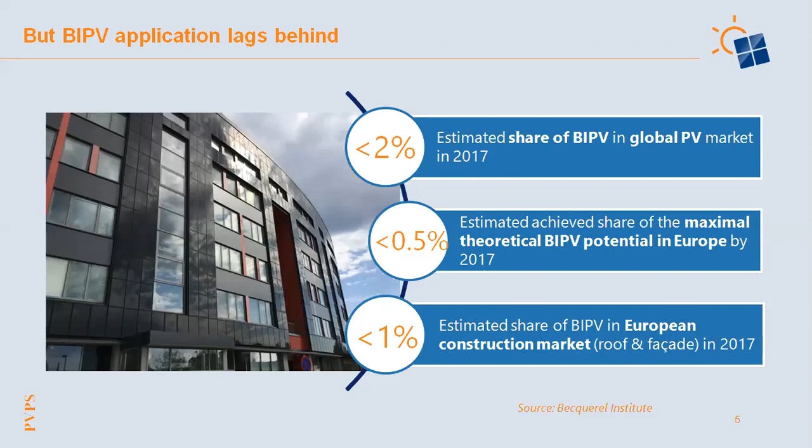What we can see here is that the global PV market is booming already for a number of years. But if we zoom into the application of PV in the built environment, BIPV, Building Integrated Photovoltaics, we see that BIPV only has a very small market share, and a very low estimated achieved share of the maximal theoretical BIPV potential in Europe, less than 0.5%. So we still have a very, very small market segment considering the whole PV market.

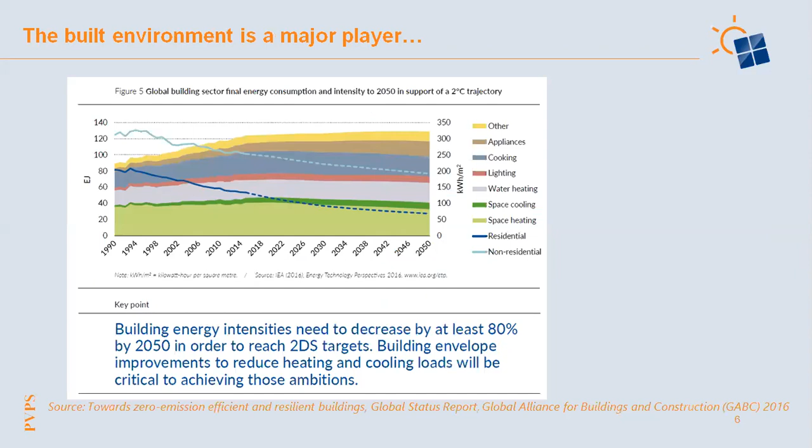While on the other hand, the energy consumption in the built environment is still increasing over time. So we have a huge potential of PV application in the built environment, especially integrated in buildings, but it's not being exploited at this moment.

And that's what we work on in Task 15. We create an enabling framework for BIPV acceleration. It's not about having a grand vision on BIPV or reaching grid parity, but it's really about the basic conditions for upscaling niche markets and products.

In a first phase that is ending now, we have focused on 5 different aspects in 5 different work packages, subtasks, as we call them. We developed a very nice database and a book with good BIPV examples. We developed business models, worked on regulatory issues, worked on environmental issues, and worked on research and development activities.

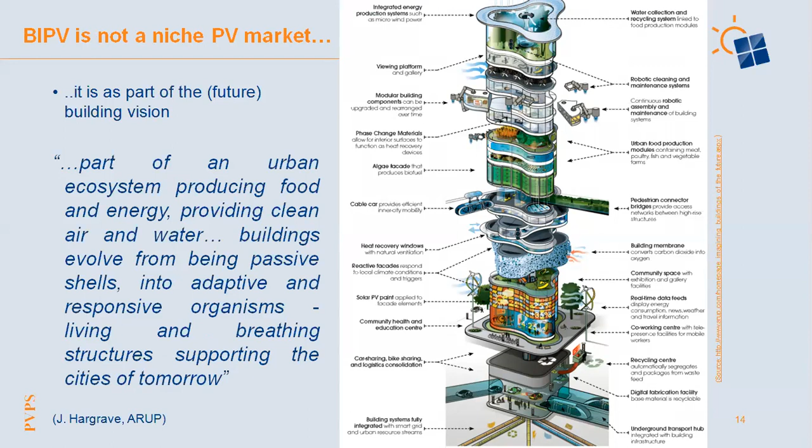I'll start with a first point: we are used to talking about BIPV as a niche market, and this is true today, because it is. But I like to conceive building integrated photovoltaics as part of a growing and dynamic construction sector, a potential and growing sector for construction fields.

I believe BIPV itself could provide an answer to a typical question we still hear today about solar in architecture. Sometimes it seems that aesthetics, architecture, and solar are in opposite positions. But I believe this is not the right question, because the answer today is clear: BIPV has potential.

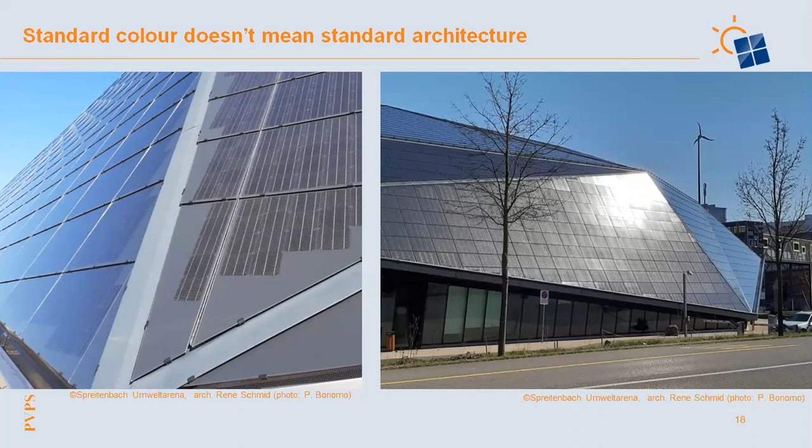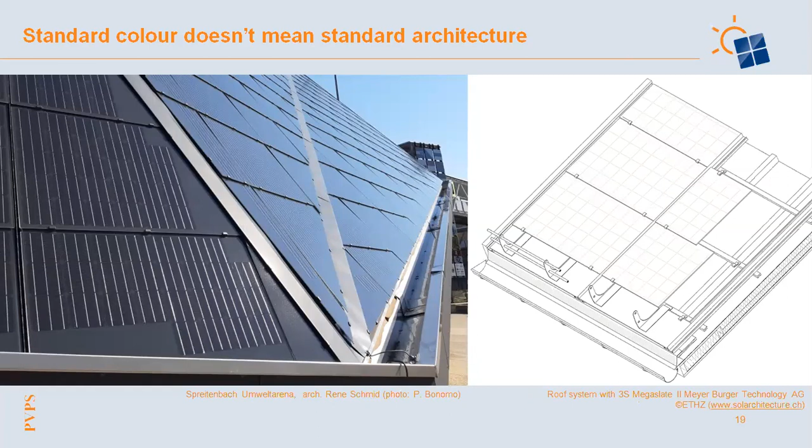Use of standard colors doesn't mean having standard architecture, like in this example, the Umwelt Arena near Zurich in Switzerland. You can see here some special details of this example.

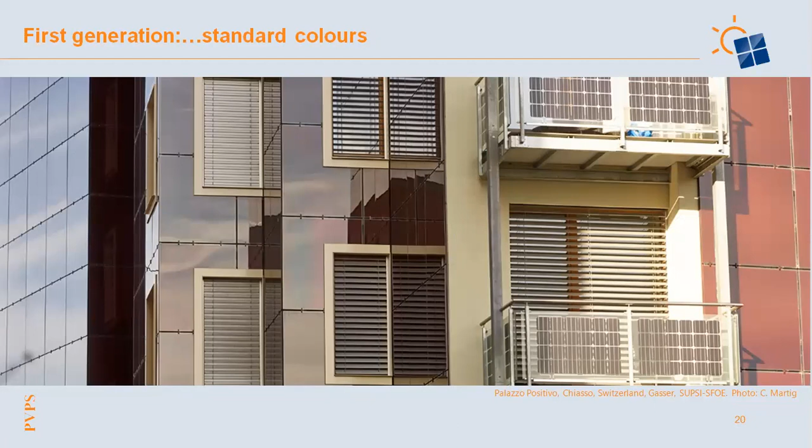It's true that with standard products, we had the first generation of integrated photovoltaics, which was connotated by a standard language linked to the technology. This is a clear example where the technology and language of crystalline silicon and amorphous silicon is really recognizable and visible. So a question is: why do we need customized and colored PV? Is standard PV not enough for this sector?

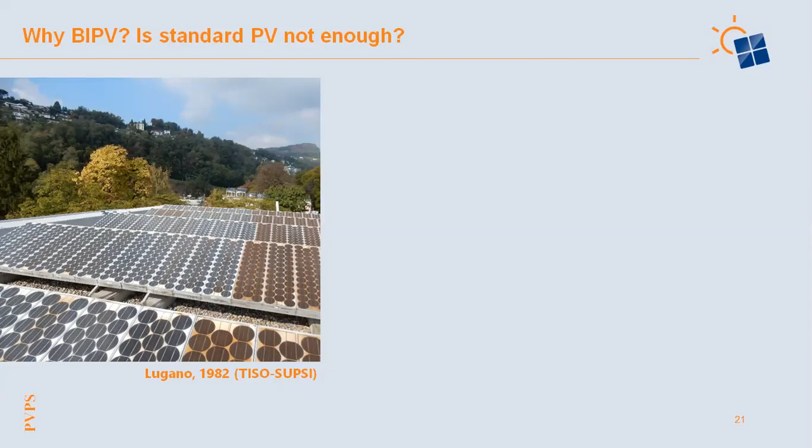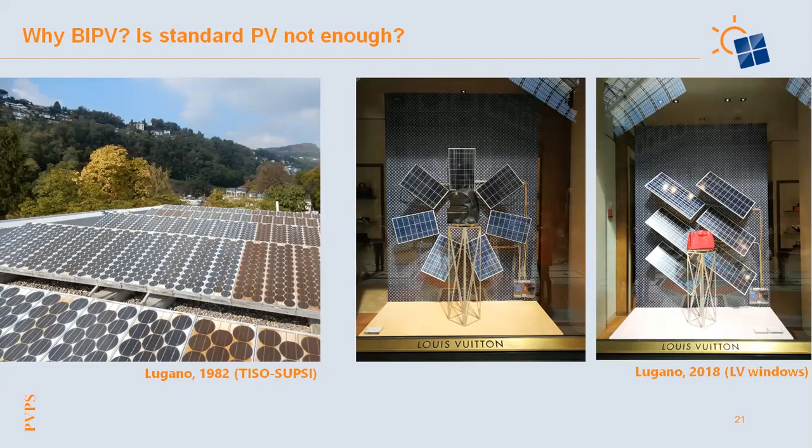So is standard PV not enough? I believe the answer can be summarized with this famous statement by Henry Ford. The problem of standardization for architecture is quite clear, because there is no standard architecture. The need to really fit with different architectural languages and different facade aesthetics is a need of the architecture and construction sector. That's why today we need, and we have, a solar evolution, meaning a real change of concept and technology.

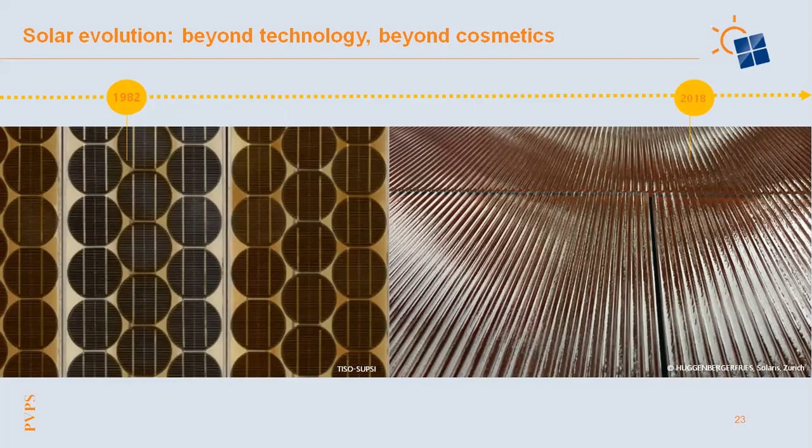Today we can observe evolution in the sector, since the basic solar component evolved from an element basically generating energy to an active element. This is not only linked to component scale, but also at building level, where we are moving from a first stage of solar roofs, mainly used on southern-facing roofs here in Europe, towards a new generation of fully active buildings.

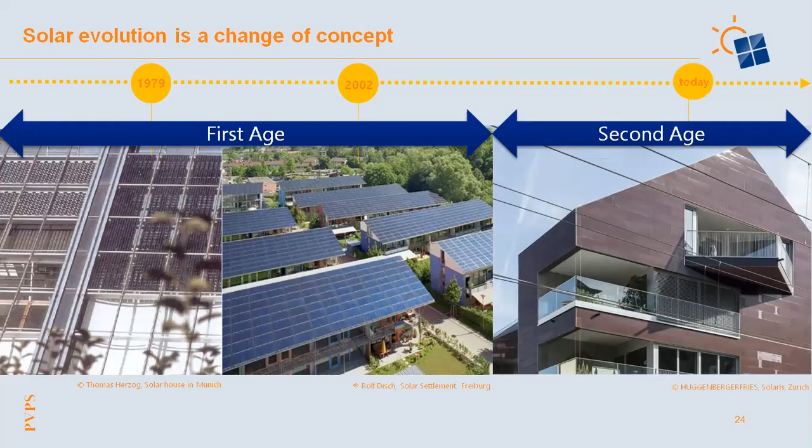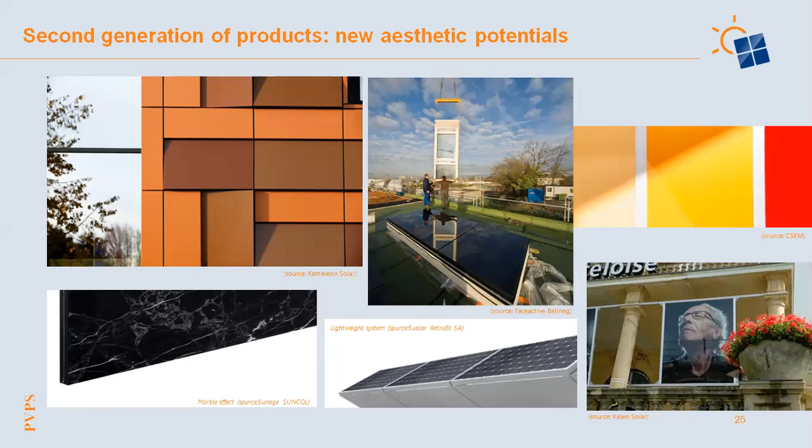You can see what is possible today thanks to industry and industrial evolution. This was possible thanks to clear improvement and evolution in the solar industry in recent years. I mention in these few slides just some of the products available today, so I think it's quite evident, without going into details, what is possible today in terms of aesthetics and construction technology. I mentioned some producers here, and I apologize to the rest for not mentioning them, but today we really have a lot of possibilities and chances for solar architecture.

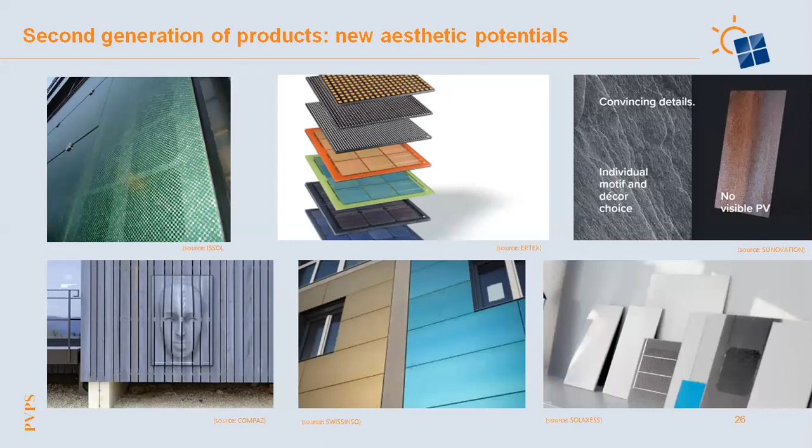We can say that in some applications, mainly based on glass technology, today the main limit is really the glass, and no longer PV technology for BIPV. So whatever is possible with glass has been demonstrated to represent a possibility for solar architecture. I will show quite briefly some examples.

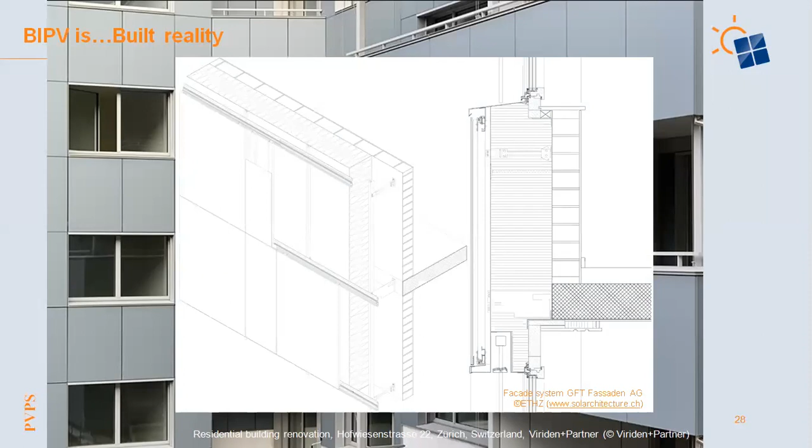Here we are in Zurich. It's a building renovated by Viriden and partner, and every surface that you observe here is an active photovoltaic surface. It's a conventional construction system for a building skin where the external cladding is replaced with a solar component.

So we have real buildings, reality of solar buildings, where all the claddings, all facades can become active. And we have also the possibility to say that nobody today can recognize that these are solar-powered houses. So this is what is possible today.

This demonstrates that we can go also beyond pilot buildings. We can adopt and implement these technologies also in ordinary building contexts.

And for who of you is curious of much more detail, I can suggest you visit our website, which is supported from the Swiss Federal Office of Energy, and we are implementing with ETH and also Swiss Solar partners. You can find here much more details about these buildings.

So this change of concept and of photovoltaic technology, of course, it's not free of challenges, because we open a lot of challenges, since we have multifunctional components, which of course have to produce energy, but they have to comply with a wider set of building and construction requirements. So a lot of points of innovation are under research and under examination from industries and from research institutions.

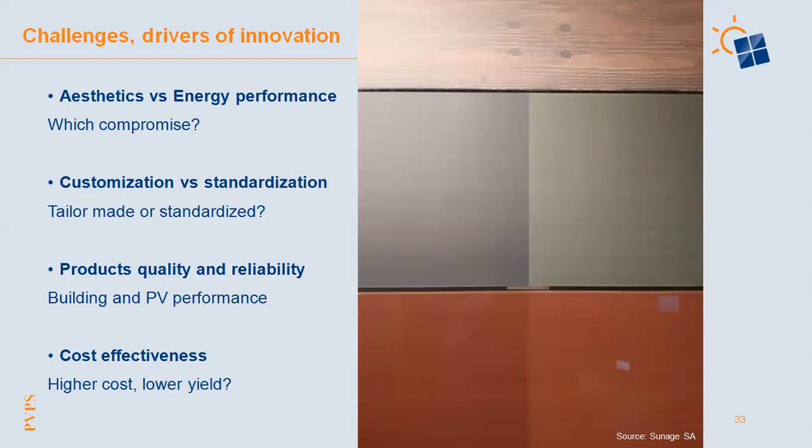I listed here some key topics on which today we are working and we are doing research. So of course, we will also see in next presentations which is the relation between aesthetics and energy performance, and also other points: standardization and customization, how they can dialogue, and also which is the quality and the reliability of such products. And last but not least, which is the cost.

I briefly mentioned this research that will be presented in detail by my colleague Erika Saretta later on. Just to show you that we are active on analyzing and understanding the performance of these devices. Investigation is important to understand which is the effect of these aesthetic treatments on the electrical behavior, on the power production, and on the reliability of such modules.

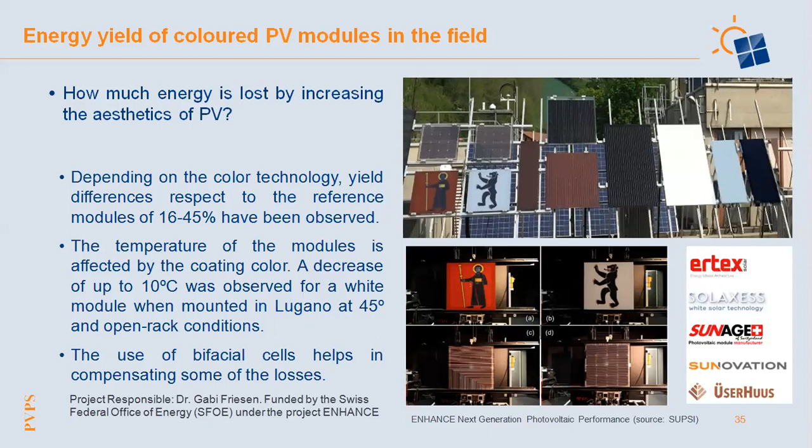And another project again here at SUPSI, I thank my colleague Gabi Friesen for this slide. You can see here another measurement campaign that we did here at SUPSI, where we characterized some main colored and special modules. We compared the performance, and we observed some interesting results in terms of energy yield and also of thermal aspects. I put here the reference to the project, so it's not the scope of today to enter in detail of this aspect, but mostly to provide you some main reference.

Another aspect is the digitalization of the process. It's a key point of today's innovation to work on a digitized and integrated process. This is most important in case of innovative technologies. So an integrated value chain and development of software for designing and supporting the real stakeholders in implementing this technology is crucial and is important. We are active also on this aspect in some ongoing European projects with our partners.

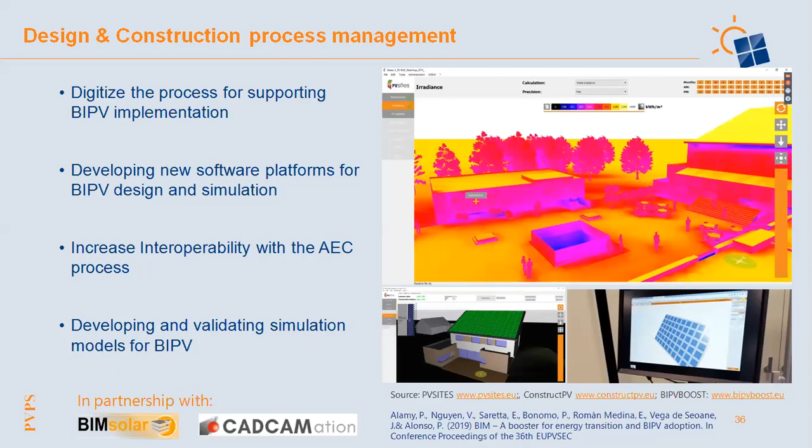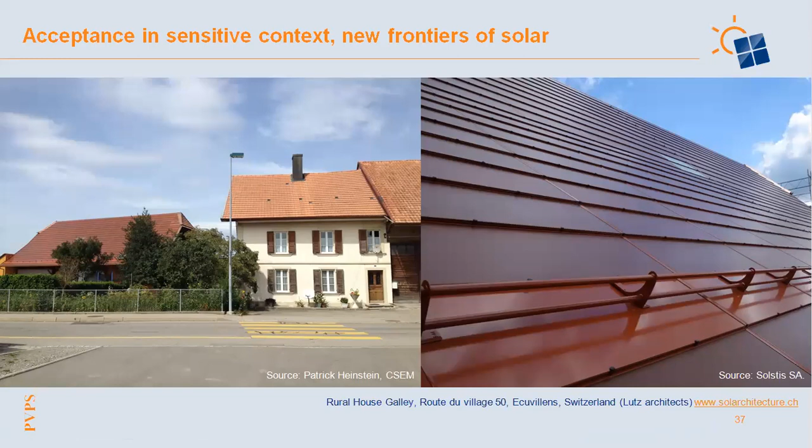Again, this technology finally also makes it possible to integrate solar in sensitive contexts and in protected areas. So this is also another added value of these technologies.

And about cost, this is another key question, because how much does the BIPV cost is a key question for the feasibility of this kind of solar technologies. This is a quite complex question, because it's important to put in clear what the cost is referred to and which cost are we talking about. Otherwise, we risk to just mention some values of cost on square meters and so on, which are not very well contextualized.

Just a quick comment on cost: it's important to highlight that the cost for making active a facade or a roof is an extra cost in comparison to a non-active element. So the basic concept is to conceive photovoltaic as an extra cost, which is a part of added cost for a conventional element, but it's also an active part.

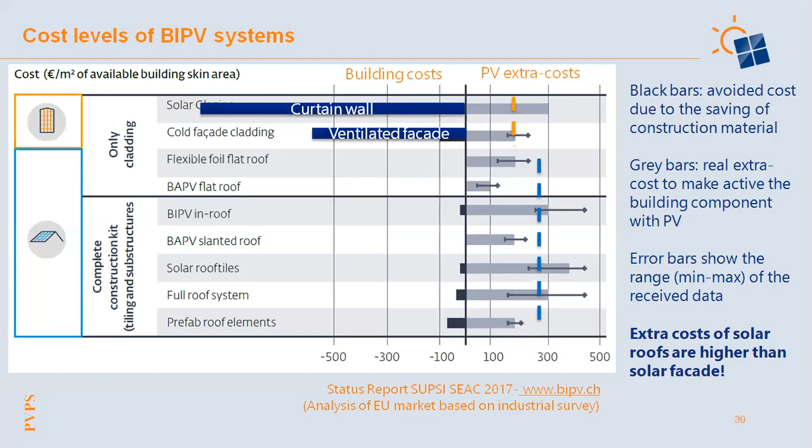So everything can be calculated also on the basis of the return of investment in this perspective. And these are some concrete results that we observed in some Swiss examples. We are investigating in detail the cost breakdown and the main voices of costs for real BIPV facades and real buildings.

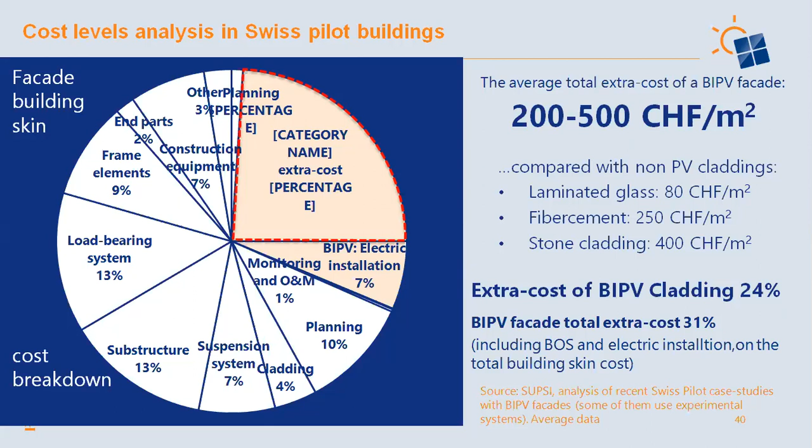These are some numbers. We observed an average extra cost of 30% on facades, and we are working on that, as I mentioned, to really investigate the impact of these technologies and also the potential return of investment.

I hope you will have the chance to go more in detail in the articles and references in my slides. So I can conclude by saying that our challenge today is not just to have pilot buildings, but to really implement BIPV as a mainstream construction product. It's important to link innovation with cost reduction and a real strategy of implementation to ensure a growing market of these products.

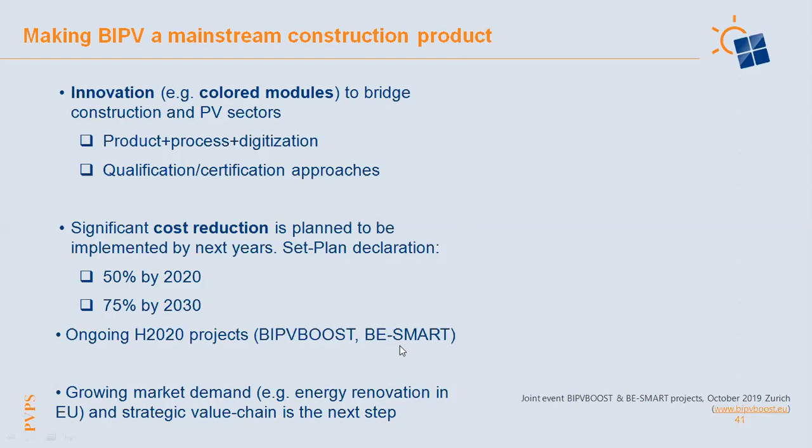I will be happy to reply to any question in the dedicated session ahead. And I conclude by saying that color is a way of integration, but as I mentioned before, we have also other challenges to solve. I hope every one of you will be part of this challenge, so I wish you a nice solar design. That's all from my side.

Hello, here is Gabriele Eder from OFI in Austria, Vienna. I will take you through the second part, the technological part concerning colors of covers, coatings, printings, and films.

At the beginning, I want to show you the principal construction of a typical BIPV module based on crystalline silicon technology. I will go to the other technologies a bit later.

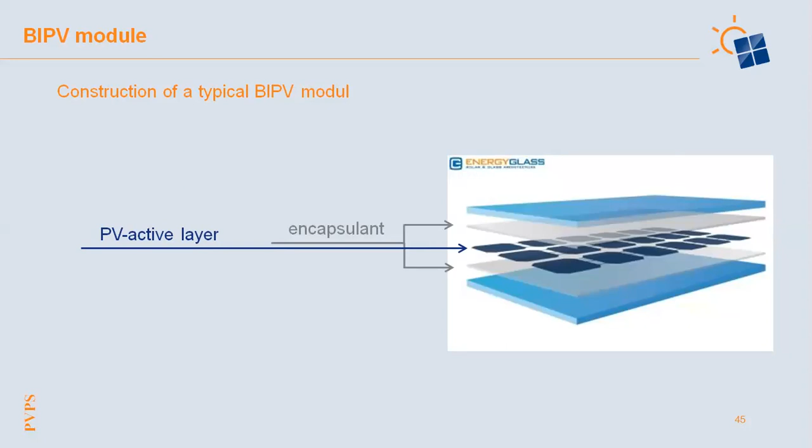So we have the PV active layer in the middle, embedded by a polymeric encapsulant. On the front side, we have mostly a glass cover, or it might also be polymeric for flexible systems, and the back cover is either glass or another panel of a construction material.

Nearly all of these layers can be colored, and I want to show you now all the possibilities realized up to now.

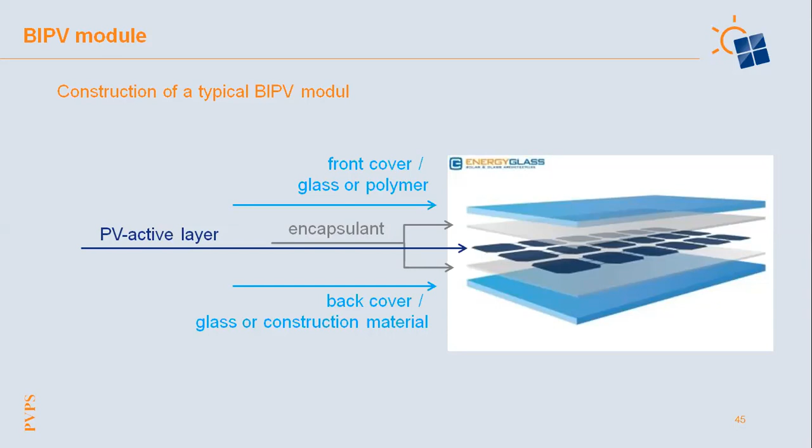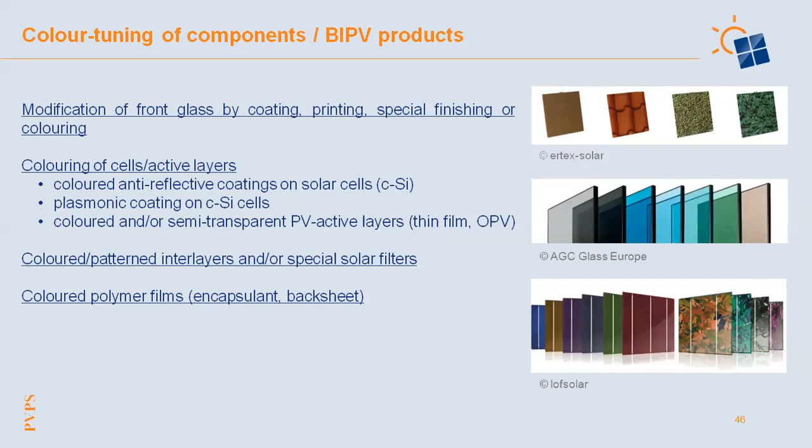But there is also the possibility to use colored or patterned interlayers, which give the color, or use special solar filters. And finally, I want to show you an example of colored polymeric films, the encapsulant or the backsheet, which can also color the whole BIPV element.

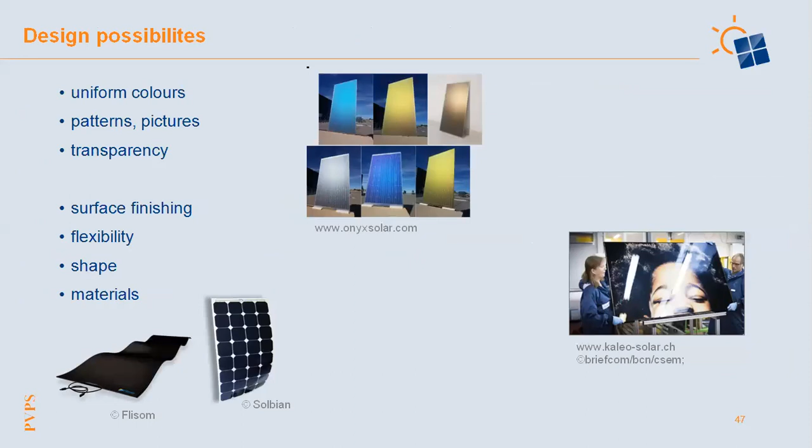So which design possibilities do we have? We can have either uniform colors, patterns or pictures, different transparency options. The surface finishing might be important, especially with respect to glare, whether we have a matte surface or a shiny surface.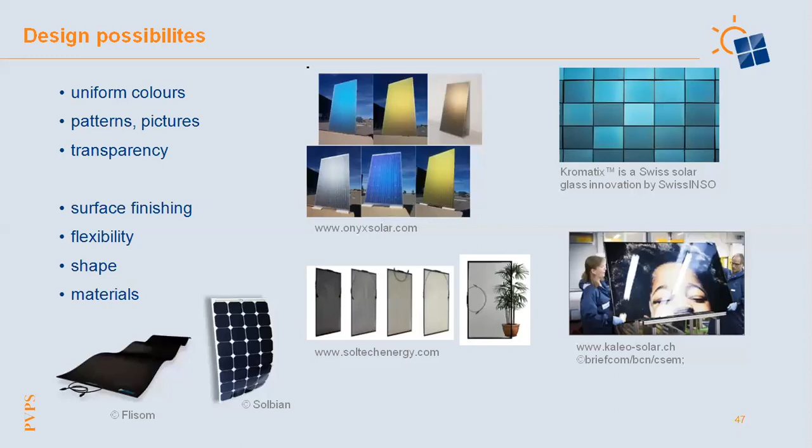As shown in these two examples at the bottom, there is the possibility to have not only rigid but also flexible BIPV modules. Here we are also a bit more open for different shapes, especially with organic PV and different materials. So for the color tuning, we have three main different implementation possibilities.

We can either do a color coding of the various components, or have a print either on a polymeric film or on the glass, or we colorize the whole material. But we always have to keep in mind that color has an impact on the efficiency of the PV module. This will be explained in detail in the last part of the webinar.

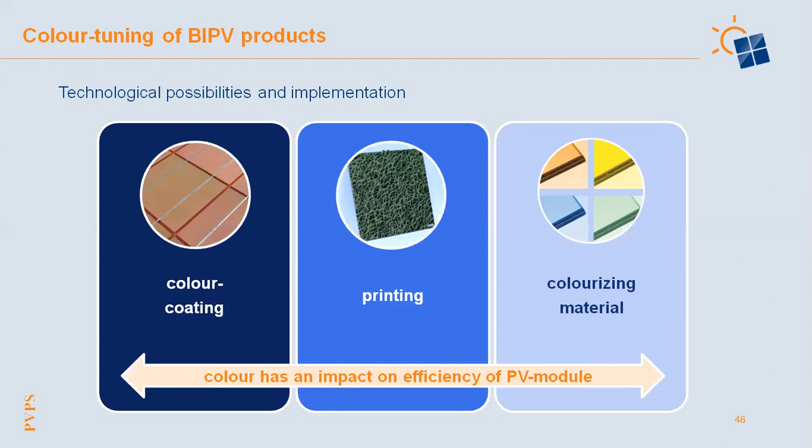So I want to start with the front glass, which surface techniques exist to color it. One possibility is to use spectrally selective coatings. The first one I want to show is the Kromatix technology, developed by SwissINSO.

They use a multi-layer reflective coating on glass. It's a specific sputtering technology, and you can have different colors such as gray, terracotta, blue, or green. As you can see in the small table I showed you, the solar transmittance is still between 86 and 90%, so that's quite a lot. You don't lose too much by using these color coatings.

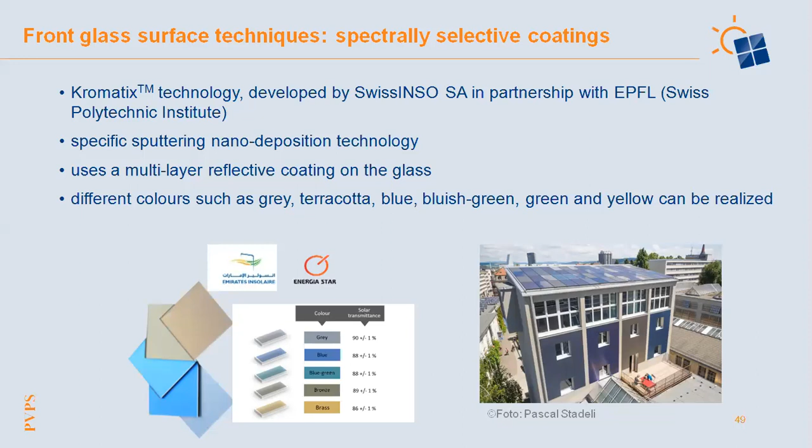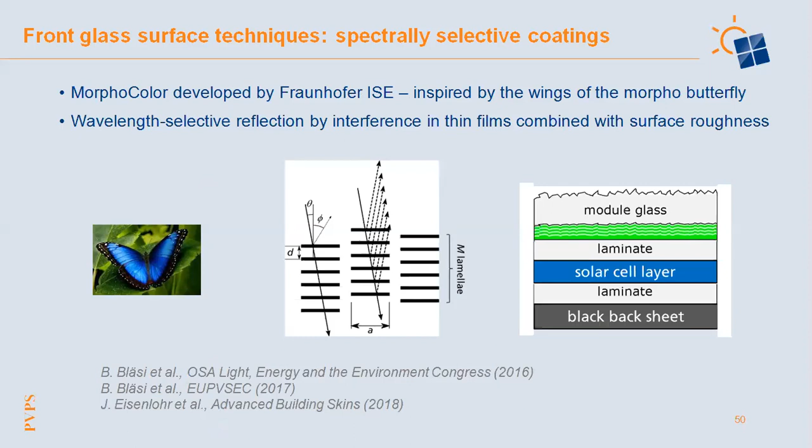Then a second technology developed by Fraunhofer ISE, MorphoColor, is also a type of spectrally selective coating. It was inspired by the Morpho butterfly, using wavelength-selective reflection by interference in thin films combined with a special surface roughness. As you can see here, you get very saturated colors with different individual color choices.

And here you also have 90 to 93% of the original efficiency of the module compared to a black one. What's also worth mentioning is that it has very good angular color stability and reduced glare effect due to the rough surface.

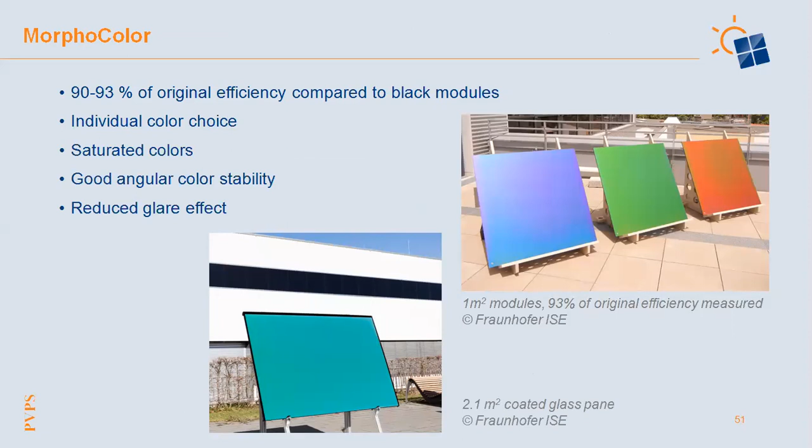The other technique to modify the glass surface is printing, either by digital printing, where before module production, ceramic colors are printed on the front glass using a 4-color inkjet printer. By using that, you can really generate each color you want to have, not only uniform colors, but also different patterns or photos printed on the glass. You can print either on the environmental side, plane 1, the outside, or on plane 2, the side next to the encapsulant.

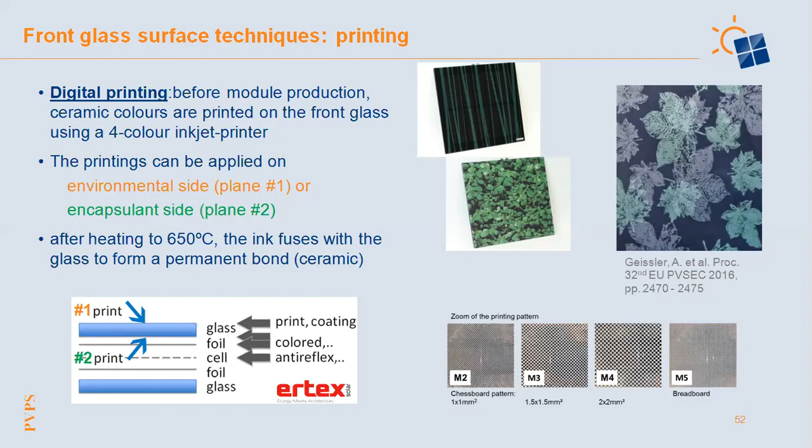It's possible to print different patterns so that at least 50% of the glass is not printed, so that enough light can pass through the glass to reach the cell and produce electricity.

Another type of printing is screen printing. Here the ink is applied through a fine mesh screen onto the glass, and you can use different fabrics as a mesh screen to generate different decorative effects. The example of this house in Switzerland was already given by Pierluigi before, where you get a very homogeneous color effect. In this case, you have a combination of printing on the inner side and a special satin finish on the outer side, giving you this colored matte surface, which is very nice.

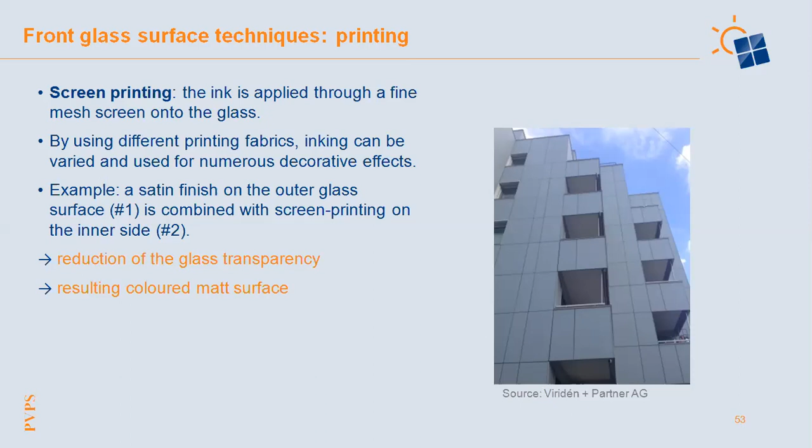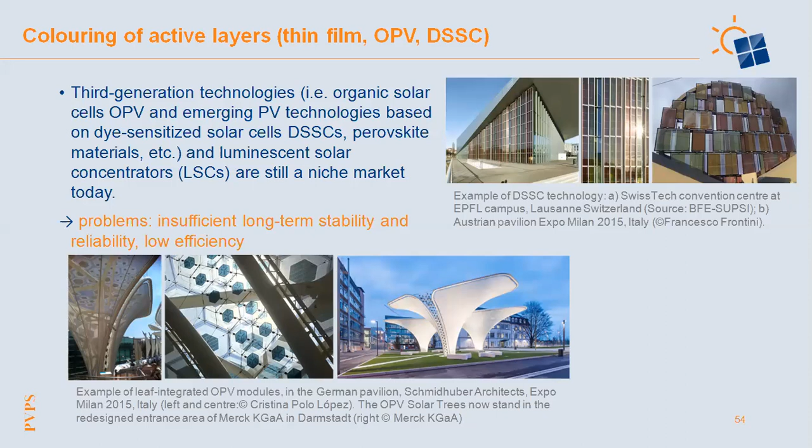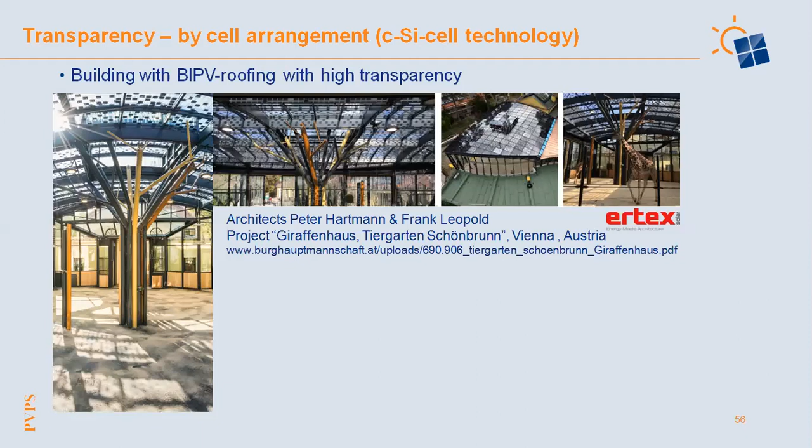Transparency with the standard crystalline silicon technology can only be achieved by a special cell arrangement. If you increase the distance between the silicon cells, since silicon is not transmissive at all, you get a shading effect plus good lighting in the room beneath. Or you use laser cutting to create special holes in your silicon cells, allowing you to control the light entering into your house using this technology.

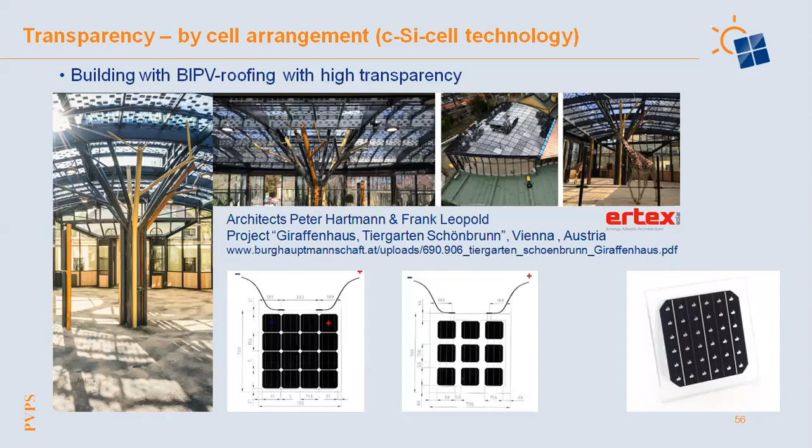Another way to color crystalline silicon cells is an anti-reflective coating on the cell with a special thickness. Nearly all crystalline silicon cells have an anti-reflective coating to decrease the high reflectance values. Usually the optimized coating has a blue color, which you all know from mono and polycrystalline cells. But if you change the thickness of the film, you can achieve a special color effect.

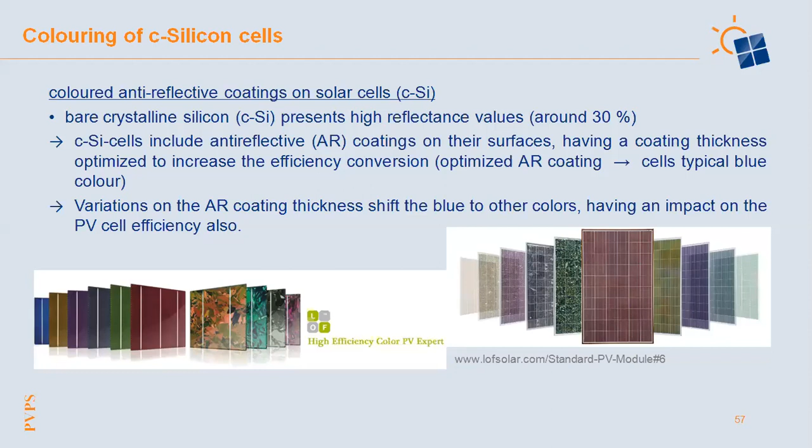Then the next possibility is to use colored or patterned interlayers or special solar filters. With this technology, CSEM, the Center of Swiss Electronic and Microtechnique, had two projects showing really white BIPV products. They used a very special scattering and reflection filter on the surface of the front glass cover, but at the expense of an efficiency reduction of nearly 40%.

Kaleo Solar realized a technological solution integrating high definition images into the solar panels. In the picture here on the right hand side, you see that you get really a very nice effect of the picture. So the last example I want to...

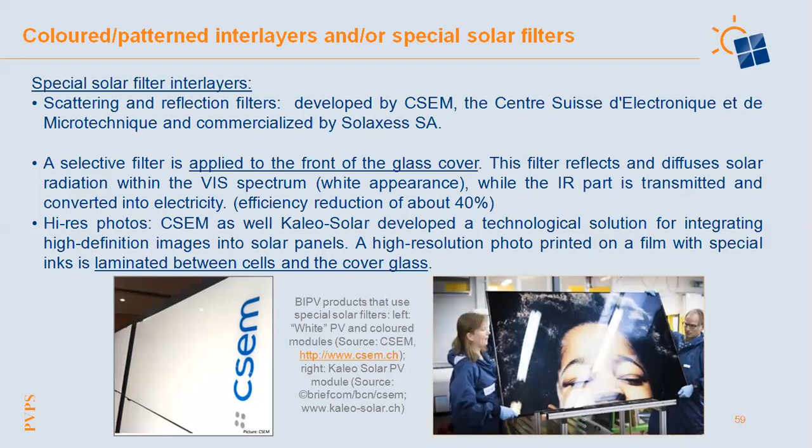You can probably take your time to finalize your pending slides.

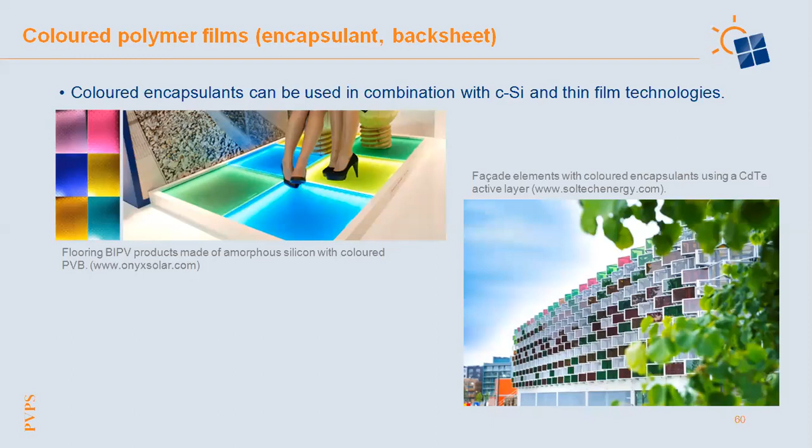I have only 2 slides left, with colored polymeric films, where in this case the encapsulant beneath the solar thin film is colored, so it does not come at the expense of efficiency.

Finally, this is the bridge to the next talk: you should keep in mind that mainly when you put a lot of effort into color and transparency, there's always this field of tension where you lose electrical performance. Thank you very much.

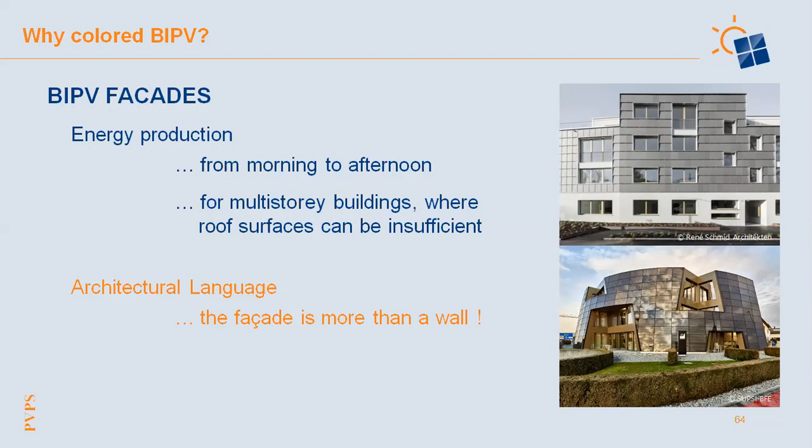This is the reason why today in the market there are colored BIPV modules that are emerging and spreading all around the world. As we have already heard from the previous presentation, there are different customization options for realizing colored BIPV modules, such as the type of glass, the type of colors, and the different techniques for printing colors on glass. There is also the possibility to choose the position of the color.

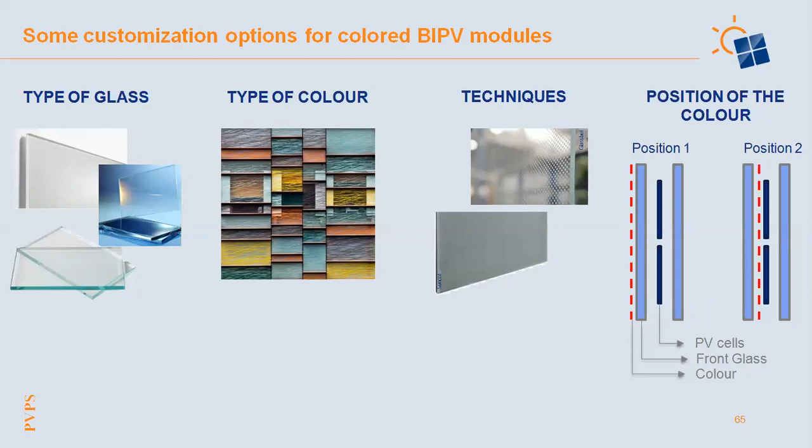We can apply color on position 1, meaning on the outer side of the front glass, or in position 2, on the inner side of the front glass. This involves that the efficiency of the PV cell of the module can decrease due to the additional colored layer put in the module, which led us to the question: how do glass customization options affect the electrothermal behavior of BIPV?

This is why today I'm going to present the results of the first experimental campaign on colored BIPV modules realized with mineral coating, and the second campaign on colored BIPV modules realized with digital glass printing.

For the first experimental campaign, I will present the results of the electrothermal characterization on monochromatic BIPV modules. In particular, we characterized the modules both indoor and outdoor: power measurements on single prototypes, and power and temperature measurements on single prototypes in outdoor conditions.

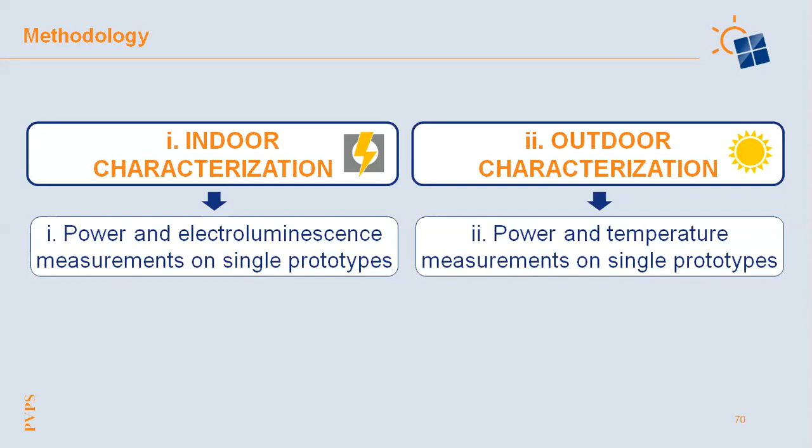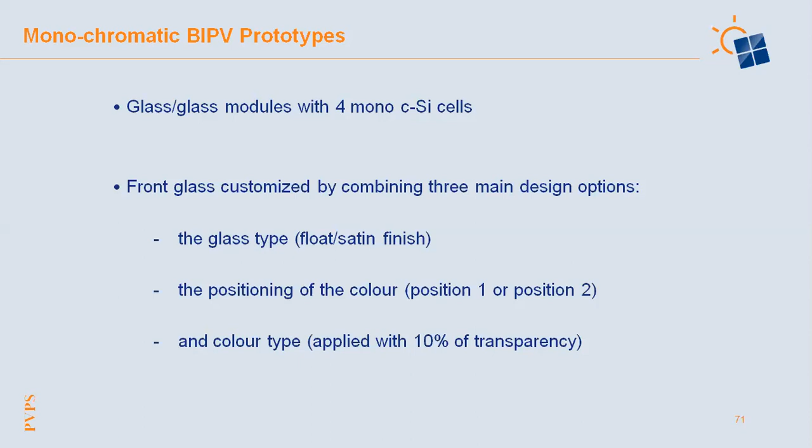Thanks to the collaboration with Swiss BIPV module manufacturers, we obtained small prototype glass modules realized with monocrystalline cells connected in series. We asked for different design options for the front glass, resulting in different prototypes with float glass or satin finish glass, with color applied in position 1 and position 2, and different color types applied with 10% transparency. Here you can see some pictures of some of the prototypes that we worked with.

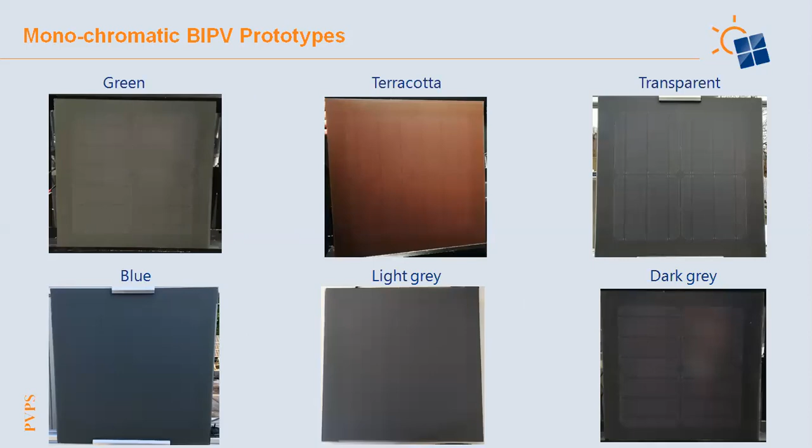Here you can see the results of the power measurements that we performed at standard test conditions. For each color, we have prototypes with satin finish glass with color applied in position 2, and prototypes with float glass with color applied on both position 2 and position 1.

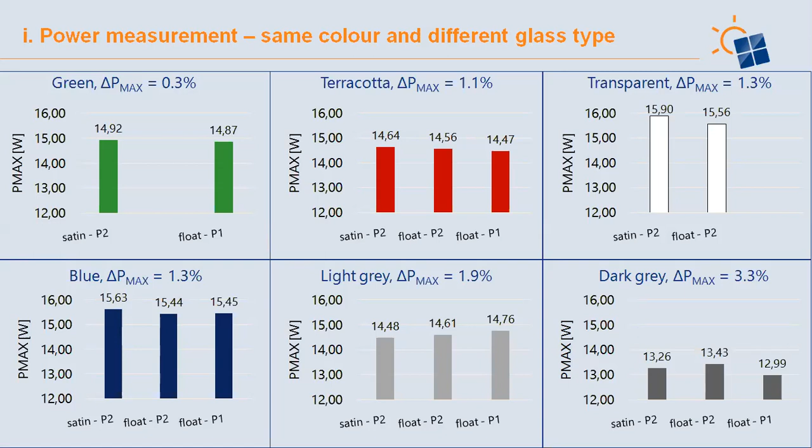What is important to note from these graphs is that the glass type doesn't significantly affect the power output. The maximum difference is 3.3% for the dark gray, and the minimum is 0.3% for the green modules. Moreover, there is no evidence of a difference in efficiency when the color is applied on position 1 or position 2. What mainly affects the power output instead is the color type.

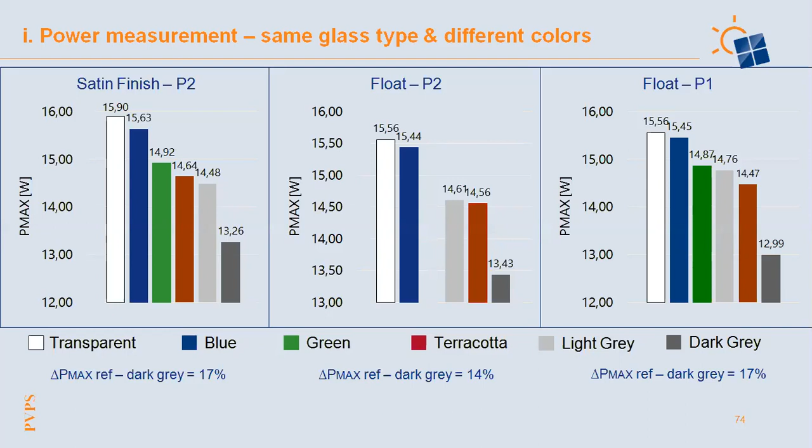As we can see here, the same results are displayed depending on the glass type. The maximum differences in terms of power output amount to 17% when we compare the dark gray with the reference model. Also, it is nice to see that the blue modules are the ones with good performance.

However, another important aspect to investigate was the possible temperature effect due to the application of color on the modules. Indeed, when the temperature of the module increases, the power output decreases. So to investigate this, we set up an outdoor stand where we installed some of these prototypes as facade elements, in the vertical position, and equipped them with a special MPPT for monitoring these small modules.

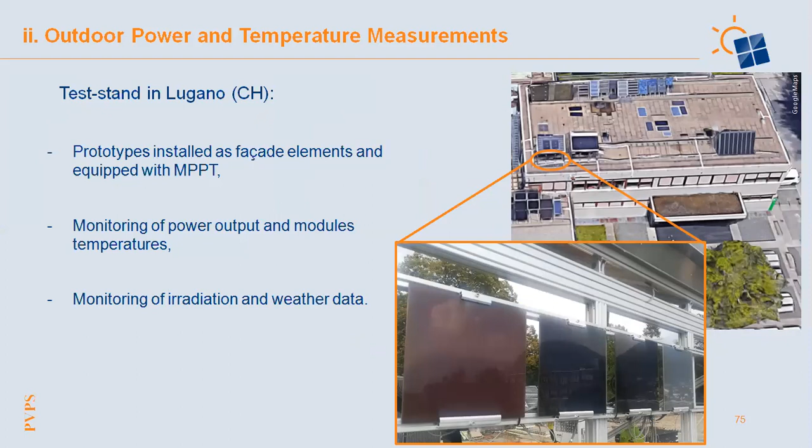From the results, it arises that the possible temperature effect due to the application of color on the modules is not so high and significant. Indeed, the temperature range among the different color modules is in the amount of 2 degrees. So we can say that different power output is not significantly affected by the operating temperature, but it is mainly influenced by the color type.

It is not due to the temperature, but due to the behavior of the radiation that hits the front glass and then the PV cells.

From this section, it arises that the main influencing parameter on the electrothermal behavior is the color type, even if the operating temperature seems to not affect significantly the power output, also because in this case, for these prototypes, we applied a low percentage of color, even if this color can be seen on the modules. So the cells from a far distance cannot be seen.

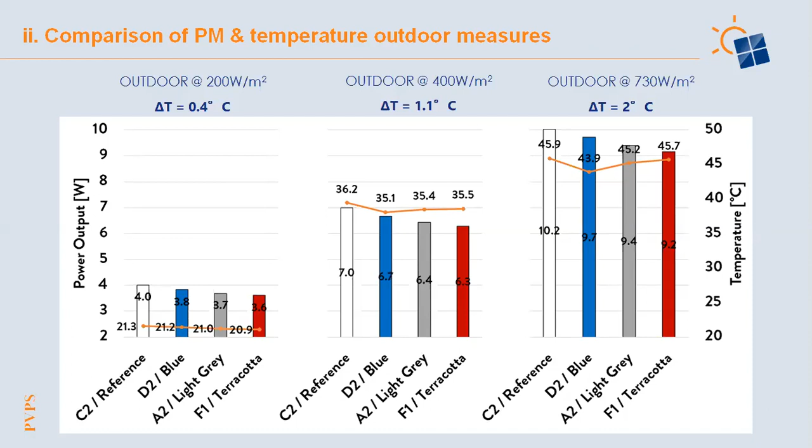So what I have presented so far is related to monochromatic BIPV modules, but now I want to discuss also the topic of designing multichromatic BIPV modules, since we want to make architects free to develop their facades, and also enable them to use different colors if they want.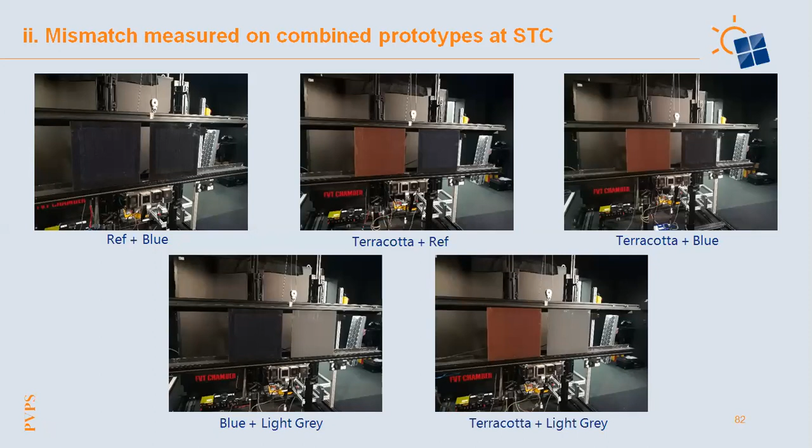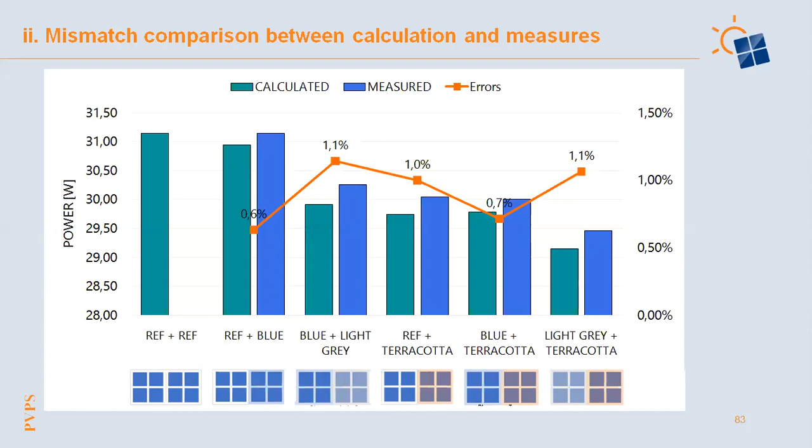So we merged the IV curves from outdoor monitoring, and we calculated the mismatch and the power output. You can see that the power reduction in this case is significantly higher, even if the trend is more or less the same.

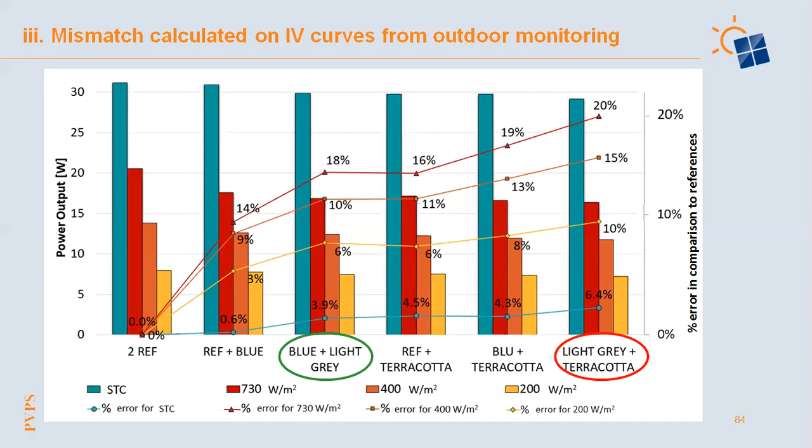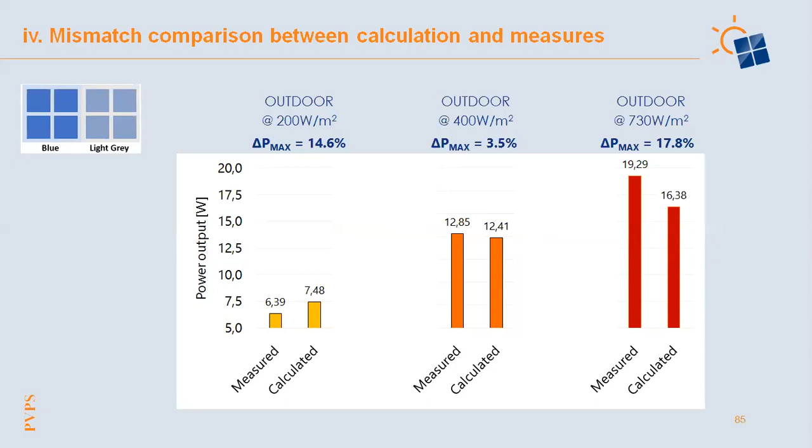So in conclusion, we can say that this calculation method for standard test conditions is very accurate, but the same calculation method for outdoor conditions has some errors due to the fact that there are real operating conditions that affect the behavior of these multichromatic modules. So this is still an open research field that needs to be investigated.

But for the monochromatic modules, in this experimental campaign, we can say that the main influencing parameter is the color type. Moreover, even if you can see the color on the modules with this low percentage of color used, the operating temperature is not significantly affected. So the electrothermal behavior of such modules is good.

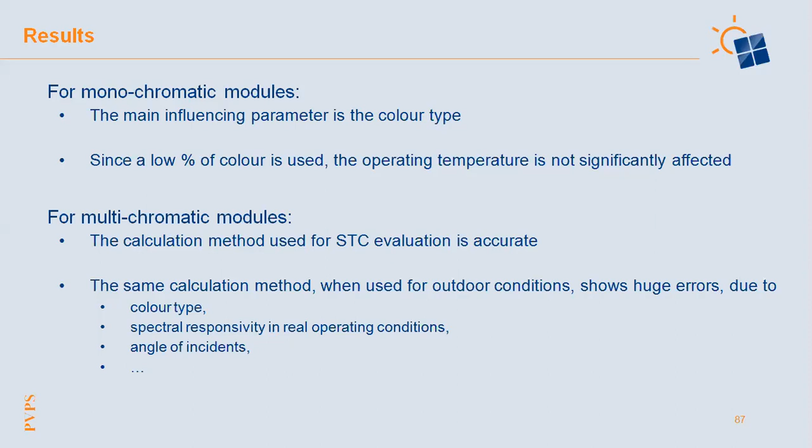Okay, so the last experimental campaign I'm going to present is about color BIPV modules realized with digital printing. We carried out this campaign in the framework of the European project SmartFlex, aimed at demonstrating the flexible manufacturing of multifunctional and customizable BIPV glass elements at industrial scale for ordinary buildings. One of the goals was to customize BIPV modules in terms of dimensions, layers, shapes, and appearance.

For this reason, we investigated different BIPV colored prototypes realized with digital printing and different customization options. We changed the color, we evaluated the change in thickness of the dots, we changed the printing degree, as you can see here, from 100% to 0% as reference, and we changed the position of the application of the color, position 1 or position 2.

In particular, we measured the power at standard test conditions and the spectral responsivity. We also measured the power for different irradiance values, and carried out outdoor monitoring of power and temperature of some colored modules.

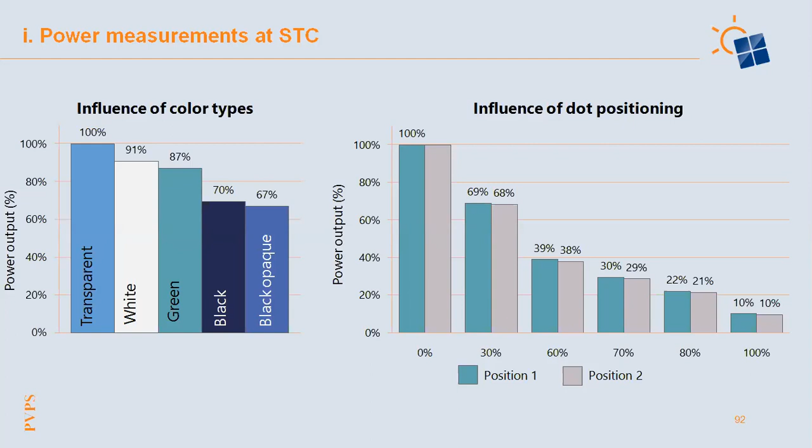From the results, you can see in terms of power output we have a range of reduction compared to a transparent module that runs from 9% to 33% for the worst case, the black opaque module. But for instance, the white and green modules have good, still good performances and power. We can say that dot positioning in this case doesn't affect the power output, as you can see here from the graph on the right.

Instead, what affects the power output is the opacity of the dots, meaning the thickness of the color applied on the glass. If you have more color on the dot, the radiation cannot pass totally through, so it cannot hit the cells and cannot be converted into electricity. This means it's a trade-off of selecting the correct amount of color to make it visible, but also to let the light pass through the dots and be converted into electricity.

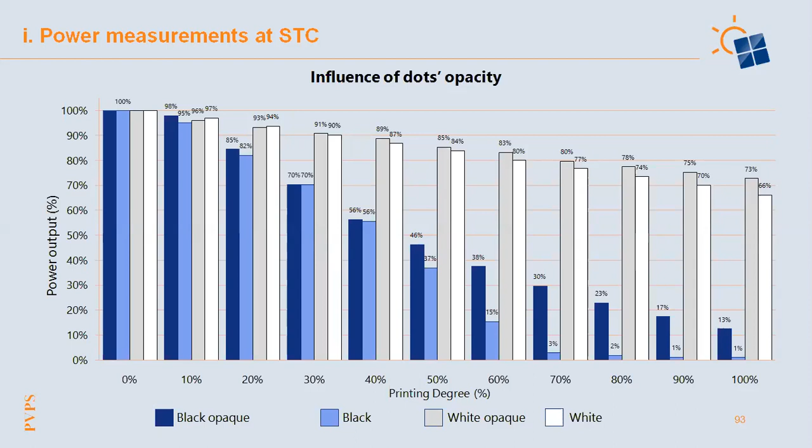We assessed also the spectral responsivity of some colored modules. As you can see here, the black module absorbs radiation with wavelengths corresponding to visible and also infrared radiation, whereas the module with green dots absorbs light at wavelengths corresponding to blue and red colors, and the module with white dots reflects and transmits light over the complete spectrum.

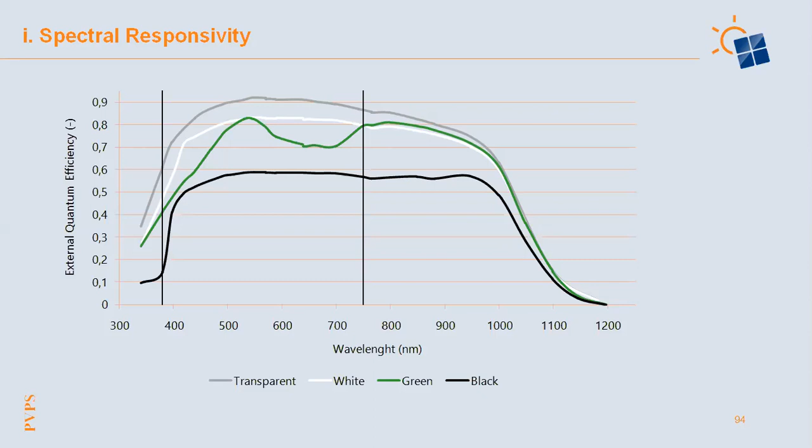This can be seen also in the outdoor monitoring of these modules, because the power output of the black modules is the lowest one, due to the fact that the light is absorbed, and this absorption is converted also into heat, which increases the operating temperature of the modules, negatively affecting the power.

Whereas, for instance, for the white module, the operating temperature is lower because the radiation is reflected, even if we still have quite good power output.

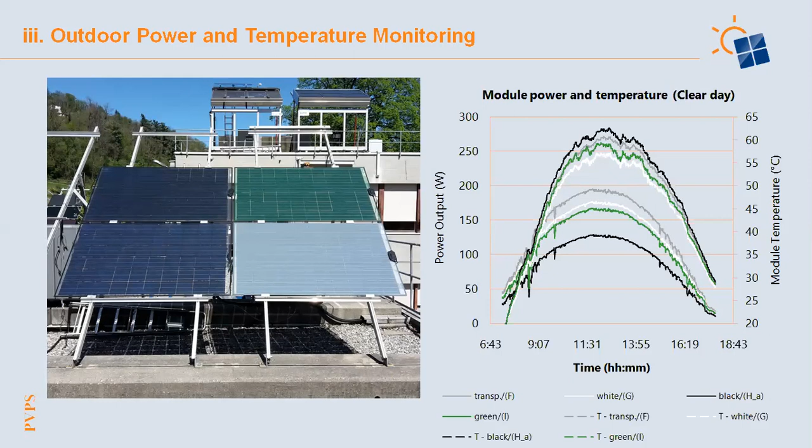So the results of this experimental campaign confirm again that the color type is the main influencing parameter on the efficiency of modules. Depending on the color type, we have different power differences - we observed differences from 9% to 35% for the black opaque modules.

Other influencing factors are the dot density, but also the opacity of the color, meaning the thickness of the dots. That affects the amount of radiation that passes through the color layer and also affects the visual perception of the color.

To conclude, we are now aware of the customization aspects and how they affect the real behavior of colored modules. These kinds of products are always a trade-off between efficiency and aesthetics, so there is always the chance to set up the right combination for having a good product, not only in terms of aesthetics, but also in terms of efficiency.